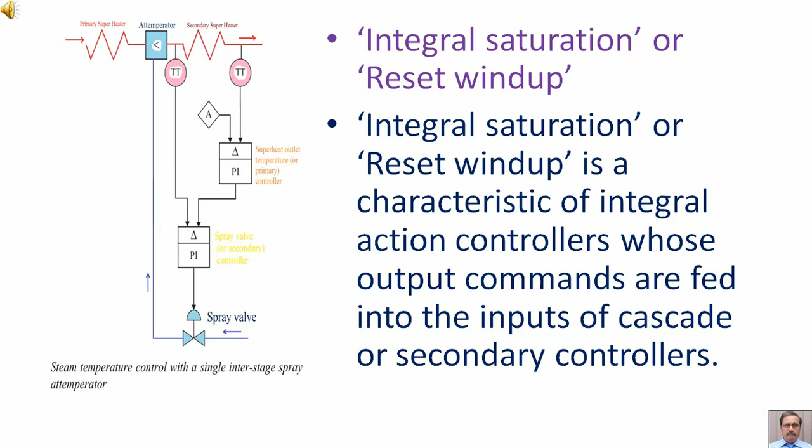Saturation. In this context, the word saturation refers to a controller output reaching a limiting value and then attempting to exceed that figure.

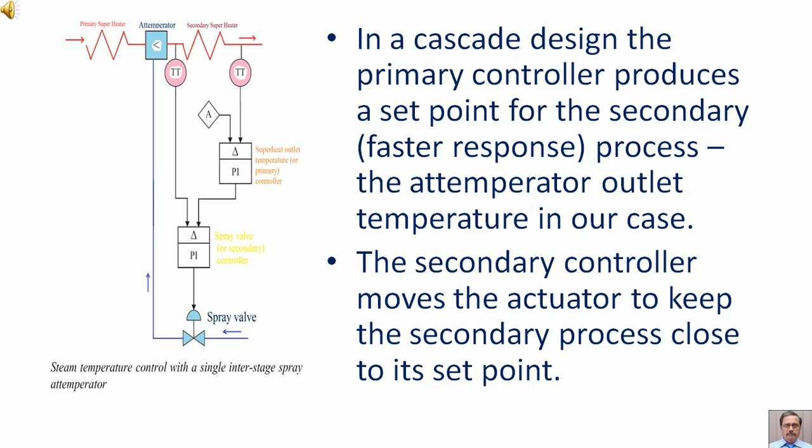In a cascade design, the primary controller produces a set point for the secondary faster response process, the attemperator outlet temperature in our case. The secondary controller moves the actuator to keep the secondary process close to its set point.

If the actuator reaches its end limits, there will be a deviation from set point in the primary process, that is, the superheater outlet temperature, and the primary controller will respond by adjusting the secondary set point.

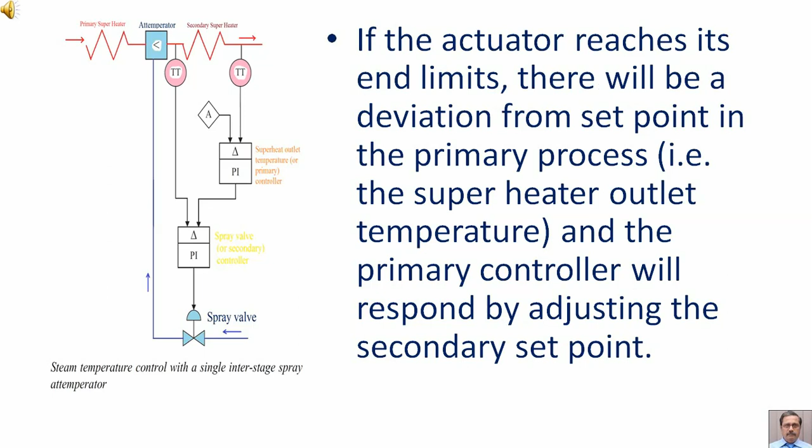Since the actuator is at its limits, the deviation will not be restored, and while the primary controller's proportional component may not vary more than a few percent because the deviation continues to exist, the integrator will wind up towards its limits.

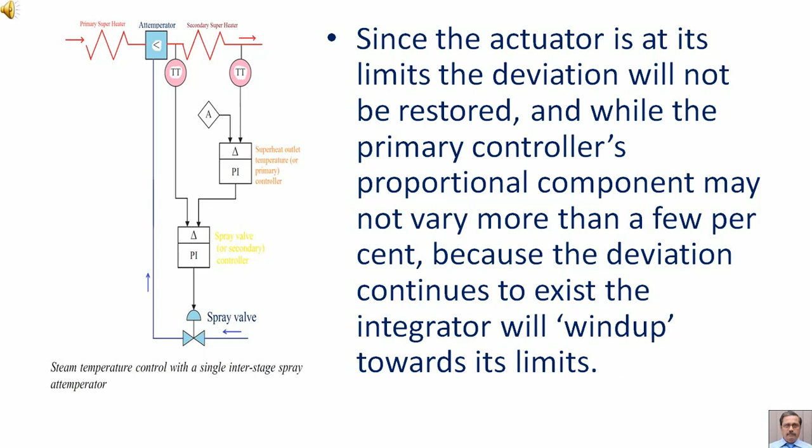When the superheater outlet temperature returns to set point, perhaps by a boiler load change or after soot blowing, the actuator will not start to respond until the primary controller's output returns to the current value of the secondary process. This will only occur after the primary process has significantly overshot the set point.

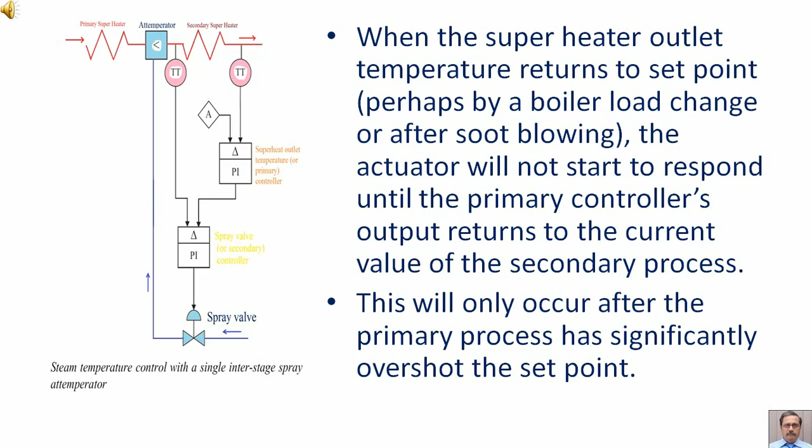A better approach is to force the primary controller's output to track the secondary process value while the actuator is at limits and while the primary process is either above or below its set point, depending on whether the actuator is fully open or closed.

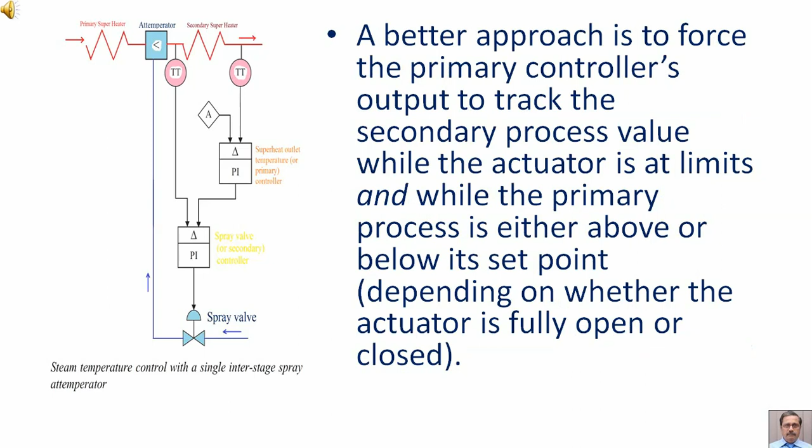Once the primary process returns to its set point, tracking is released and the actuator can immediately start to move. Some DCS suppliers provide this facility in their standard controllers. Others require external logic to be configured.